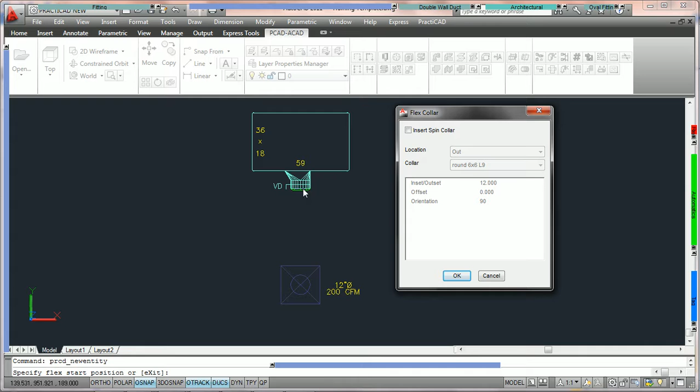Once we attach to the first point, PractiCAD is going to open up a little Flex collar window. There's only two options here: to insert a spin collar and keep it checked, or to keep it unchecked. When you're attaching Flex to the end of existing duct, as in this scenario, we keep it unchecked. Soon in other tutorials we'll explain what to do when it's checked. If we do have it unchecked, all we need to do is snap to the end and then press OK. There's nothing more. When you press OK, the Flex collar window will close.

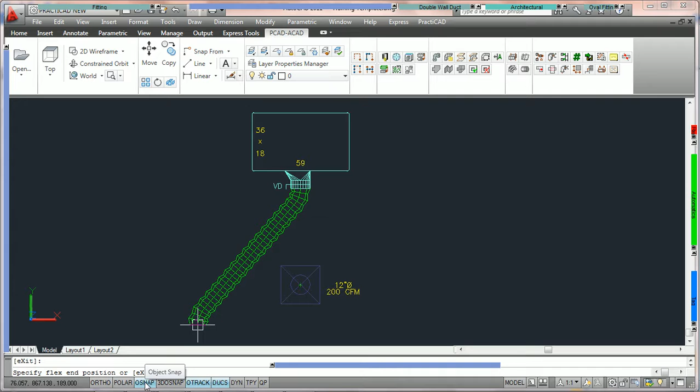Now you can see the Flex is being stretched to my crosshairs. All I need to do is grab onto a grill and snap to the end point, which would be at the center of the grill. It's important to make sure that you have your object snaps on. Obviously, you can see in the bottom we've got object snaps turned on. If you don't, you're not going to be able to snap to the grill. If you've got them turned on, you can click once. PractiCAD is going to stretch out the Flex, and you've now successfully placed Flex between two entities.

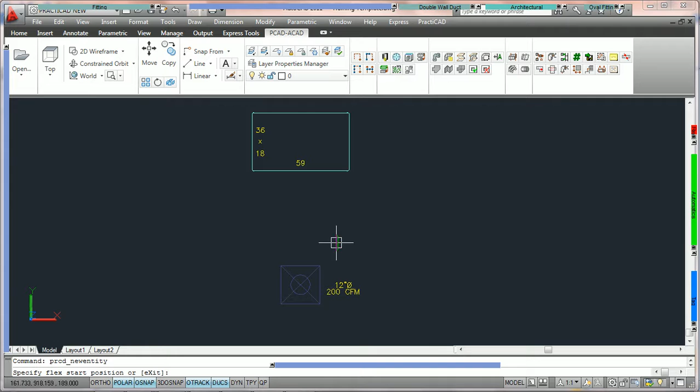The next thing we're going to show in the Flex tutorials is how to use the Insert Spin Collar function. What we're going to do is delete the Flex and the tap here. And what we've got is just a piece of rectangular duct and a grill. If we would like, we can come into the architectural bin, we can grab our Flex, then we can come over and snap to the grill neck first. If we snap to the endpoint to the grill neck first, and then bring the Flex over to the in connection of the duct, when we click, PractiCAD will open up the Flex collar window.

And here we can say that we obviously don't want the Flex on the in connection. We want to insert a spin collar. And we could choose to insert spin collar and say location on the in or out. In is the in joint. And then we can choose the spin collar we'd like to use. And here we have a catalog that's already preset. There are separate tutorials that teach you how to build catalogs of spin collars.

Here we're going to pick a 12-inch spin. Now it's asking for the inset outset parameters. This 12 inches means that we're going to put the spin's center 12 inches from the in joint. And then we've got the offset, which is actually going to control the spin's elevation up and down across the side of the fitting. So right here what we're going to do is state we want it to be at, let's say, 9, because we have an 18-inch depth fitting.

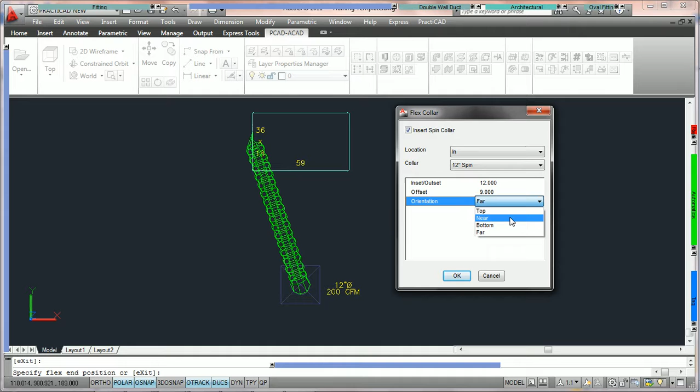We then have the orientation parameters. Just like in tap parameters, we have near, top, bottom, and far. Near always means the right side of the fitting if the airflow is coming in the in joint. Far would mean the opposite. Far is usually the left side of the fitting. So if airflow is coming in the direction you see my cursor, the right side would be near, the left side would be far. And of course, top and bottom is top and bottom. Here in this tutorial, we want to put it on the right side, so we're going to say utilize the near.

Once you press OK, PractiCAD automatically places a spin collar there for us and hooks the Flex up to it. We've successfully attached Flex and had PractiCAD insert a spin collar for us.

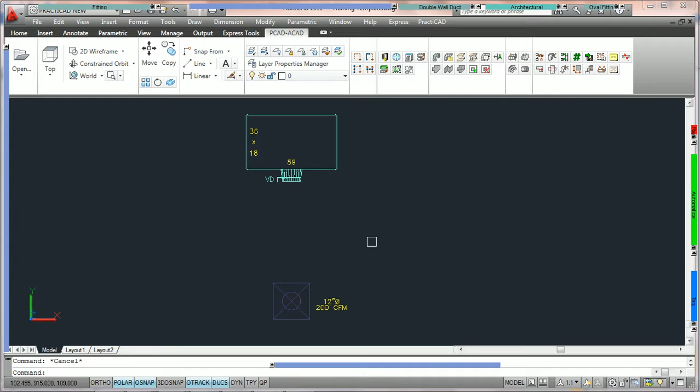The last way to route Flex is to use AutoFlex to route between two points. There are separate tutorials on AutoFlex, but as a quick tip, we can highlight between the end of a specific fitting and the grill, come over to our automatic bin, and click end of duct Flex no max automatic. Clicking that will route Flex between the points, and it'll also do multiple taps with multiple grills at the same time. This is actually the preferred and quickest method of attaching Flex between two points.

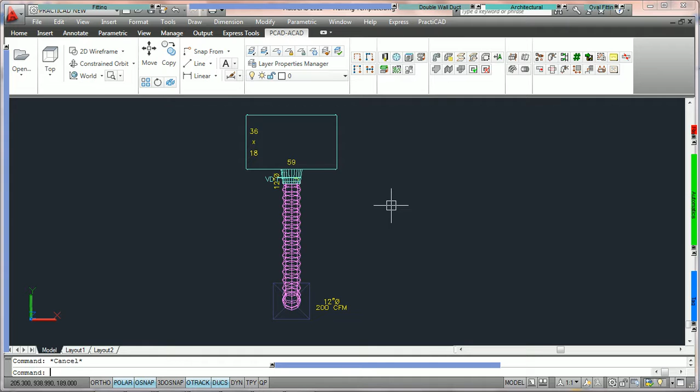Next we're going to explain the different parameters we offer with Flex and how we can edit Flex after it's placed on the drawing. What we've got here is Flex placed between a conical and a grill. We'll click on the Flex parameters and take a look in the AutoCAD property box, focusing on the geometry parameters.

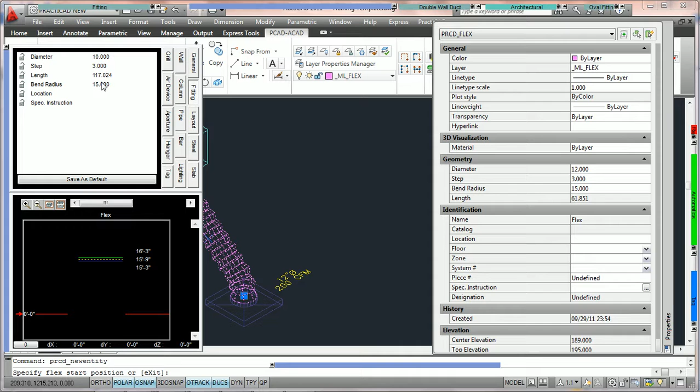There are 4 main parameters. These are the same parameters you see when you grab a new piece of Flex and go into the item box. Inside the item box you'll notice the diameter, the step, the length, and the bend radius, and the same 4 parameters appear in the AutoCAD property box.

The diameter controls the diameter of the Flex. It can be edited at any time on the fly, and most of the time it's automatically picked for you based on whatever you snap to. If you take a piece of Flex and snap it to a square elbow with an 18 inch diameter, the Flex will adjust itself to be 18 inches.

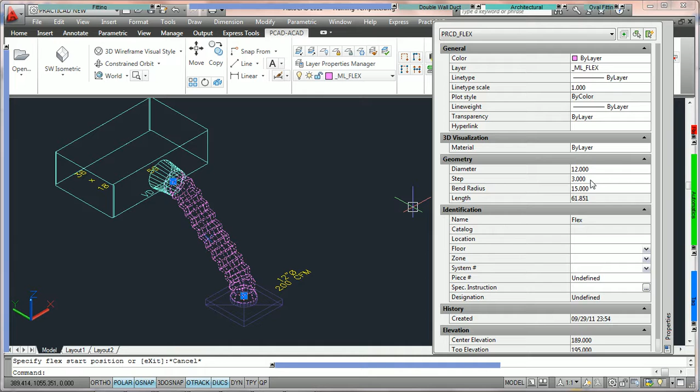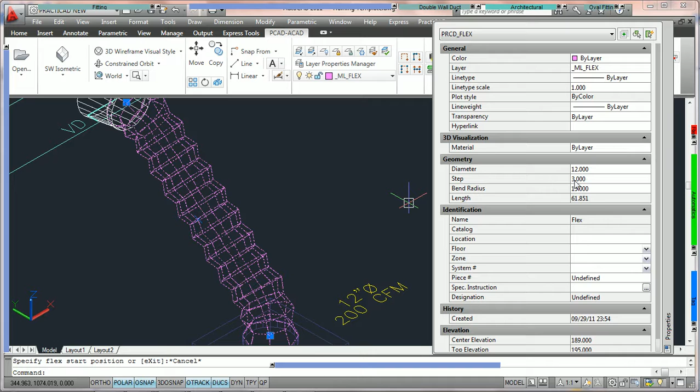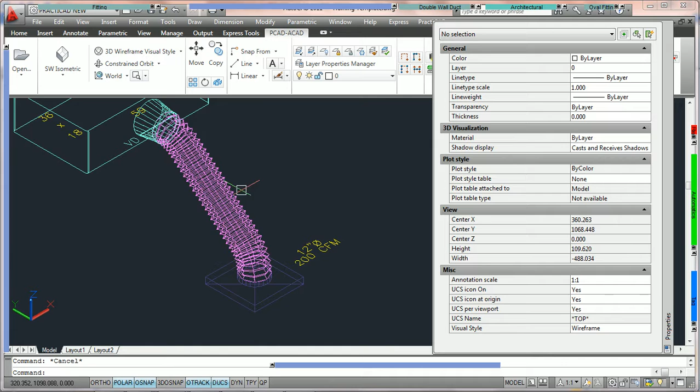Step has to do with the appearance of Flex. If we zoom in, you can see a specific number of rings that Flex offers, and the number of rings between two points, or the spacing between them, can be controlled by the step. The lower the number, the smaller the rings, and therefore the more you will see. Currently we have Flex in the 3D wireframe visual style. If we adjust the step and lower the number from 3 to 1, it'll put more rings, actually changing the appearance of Flex. We can raise the number to have less rings, or lower it back to a standard number like 3 to have more rings. We can adjust it to any value we'd like.

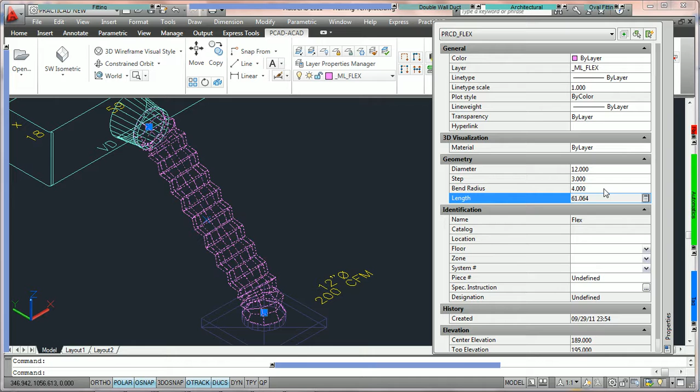The next parameter is the bend radius. Currently the bend radius is set at 15, but we can raise or lower this number. In this tutorial we'll change it to 25, which increases the amount that the Flex bends between two points. The lower the bend radius, the straighter it will be. For example, if bend radius was just 4, we'd go almost directly from the conical to the grill. If we raise the bend radius, we'll start curving more down towards the grill.

The length is always calculated for us automatically. We'll go over separate tutorials on duct line editing with Flex, but essentially this number represents the length of the Flex, and it does change. Whatever way you stretch Flex between two points, it's going to read this number, which cannot be adjusted from the property box. You cannot change the length of Flex here.

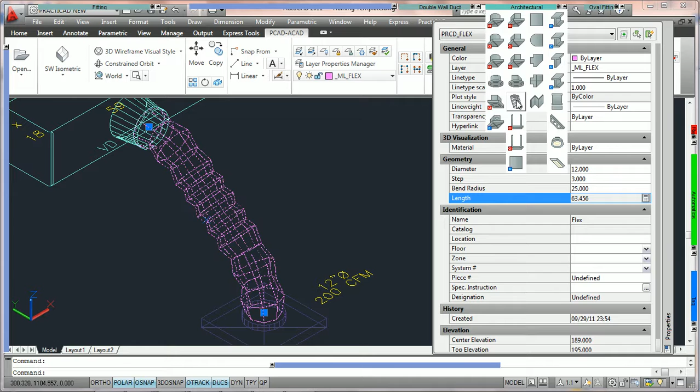Also, if you have any trouble changing a parameter in the AutoCAD property box, that's a sign you're using Flex that's a catalog entity. Catalog entities, or Flex that has been catalogued, cannot have these parameters changed. This right here happens to be the standard PractiCAD Flex, so it can be changed at any time on the fly. That concludes going over the parameters of Flex and editing Flex.